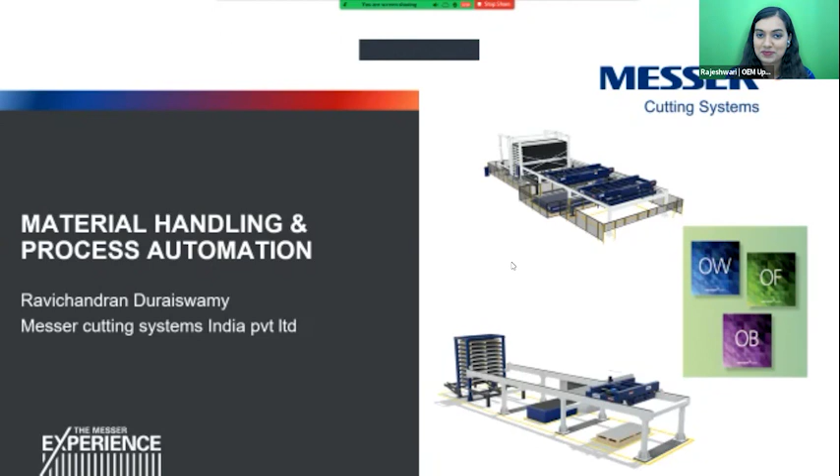Today, I'll talk about material handling and process automation in the thermal cutting industry. I'm basically from the thermal cutting industry, so my examples will typically be from that industry, but it can still be taken up as a general statement across industries.

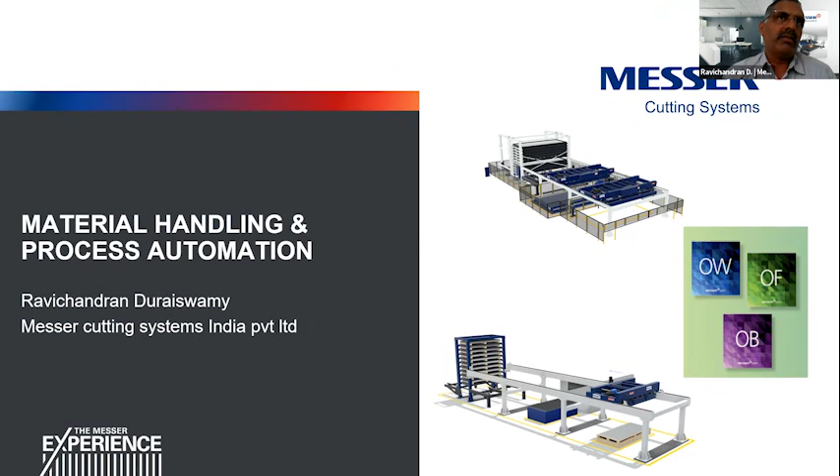Now the demand for quality goods is too high, and it cannot really be manufactured using the old method, which involves a lot of manual labor and manual monitoring. If you want high productivity, you need more automation in your systems, whether it's process automation, automation for feeding the machines, or, as our friend Mr. Shrikant explained, automation on the logistics side. So automation helps the industry achieve higher productivity and more reliable production. It's like everything goes hand in hand.

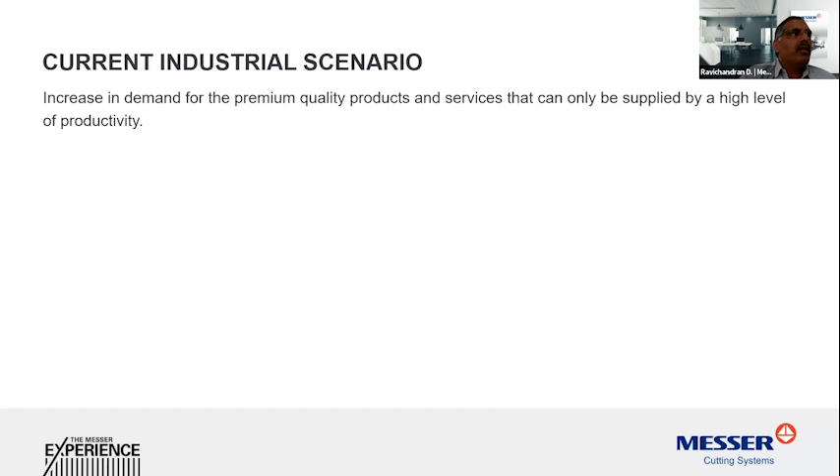The industry is also looking at a lot of cost-cutting measures. I don't mean cutting down people, it's about bringing down the cost of production and the cost of the whole system getting organized. So if you want a high level of productivity, you need very good process engineering systems, and automated machine manufacturing.

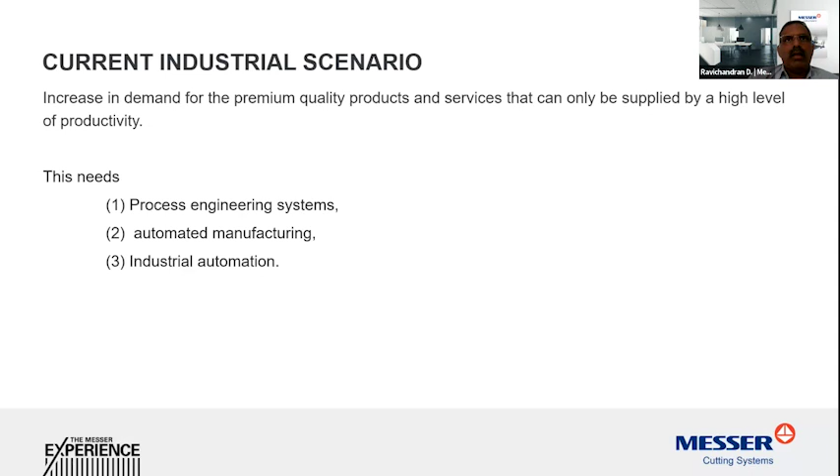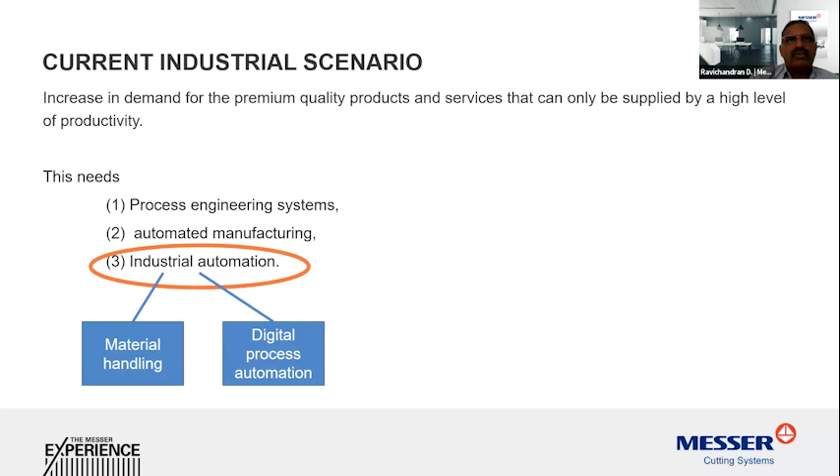I would like to linger on the third one, industrial automation. Industrial automation aids automated manufacturing, feeding the machines through material handling systems, and monitoring the process through digital automation. These two aspects greatly enhance productivity and bring out an agile manufacturing system. It reduces manual labor inputs, decreases cost, increases productivity, and makes production more consistent.

When you have digital process automation, there's more transparency in the whole production system. You can have real-time monitoring, well-advanced scheduling of your process, and you can get back data to check whether it's actually happening or not. If there's any discrepancy or deviation from the actual plan, the process will give you pop-up information so you know right at that moment that a deviation is occurring, and this helps increase productivity.

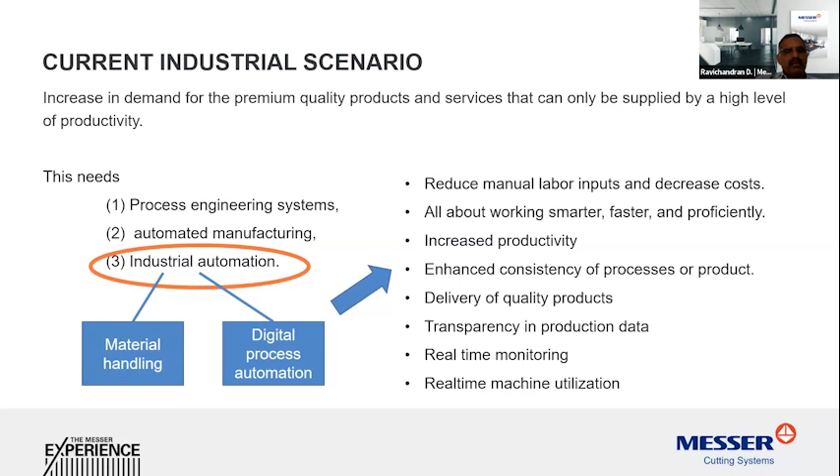Let's talk about these two aspects in two different ways: material handling and process automation. For material handling, what thoughts go into the industry that can aid the material handling system? If you want to increase productivity, you shouldn't have to wait for people to load the machines, because manual labor is not efficient right from morning till evening.

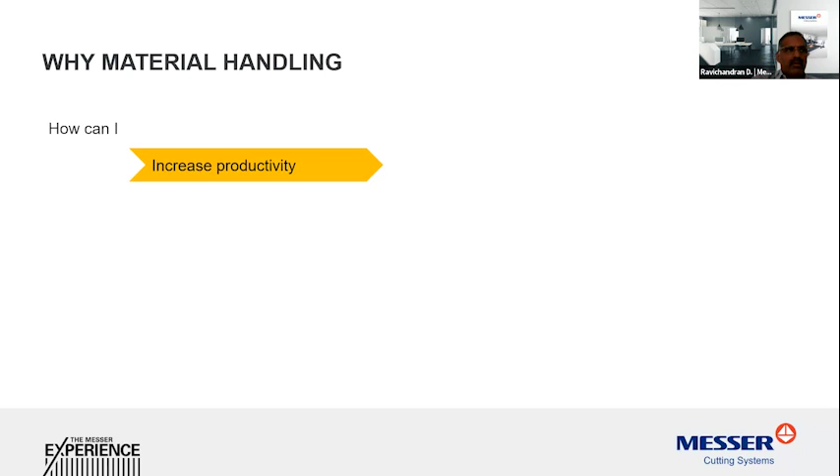Efficiency will be high in the morning and decreases at the end of the shift, and it goes on the same way day after day. Also, in days to come, there's a shortage of manual labor. So how do we increase productivity?

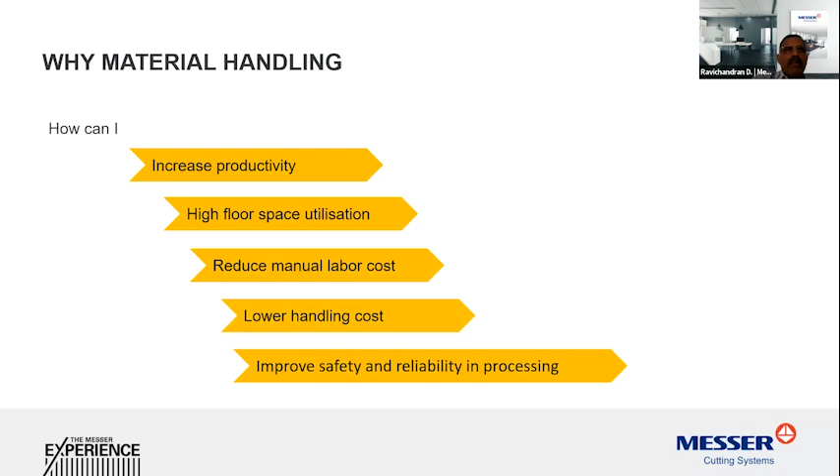When you have an automated storage and handling system, how do I increase floor space utilization? How can I reduce the floor space to fit more manufacturing units in a given area? And then how do I reduce manual labor cost and handling cost, and make the process safer and more reliable?

With a material handling system, I can ensure you can increase your production by 15%, reduce your storage area by at least around 40%, reduce manual labor by 80%, which directly leads to lower handling costs. And when you have a material handling system feeding your machine along with a process automation system, you can be rest assured that the operating zone or manufacturing zone becomes a safer and more reliable area.

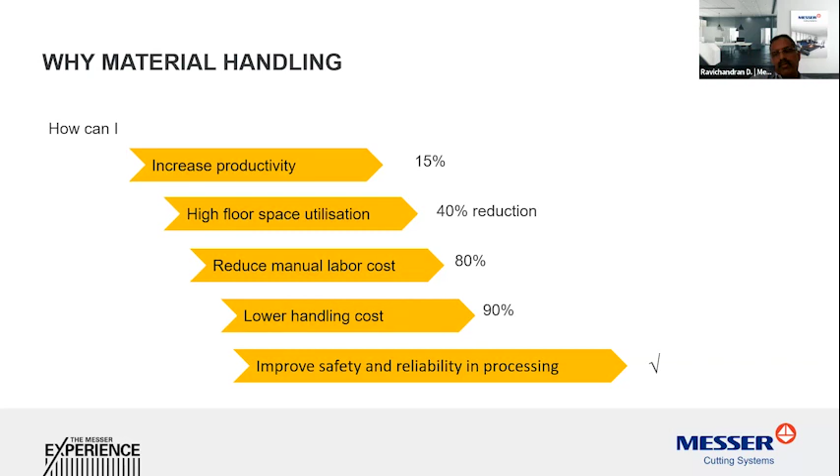This increases the flow of material, reduces stoppages of production machines, and so it increases productivity indirectly.

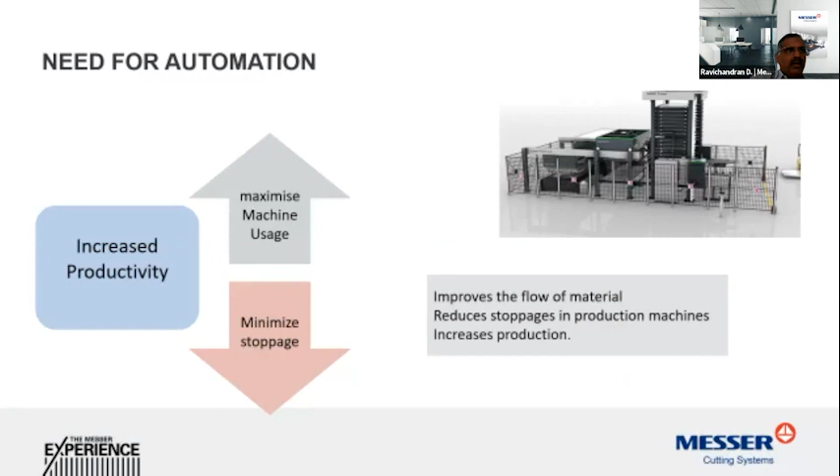At Messer Cutting Systems we have a series of material handling systems mainly for plate and sheet metal handling, since our industry is mainly into thermal cutting.

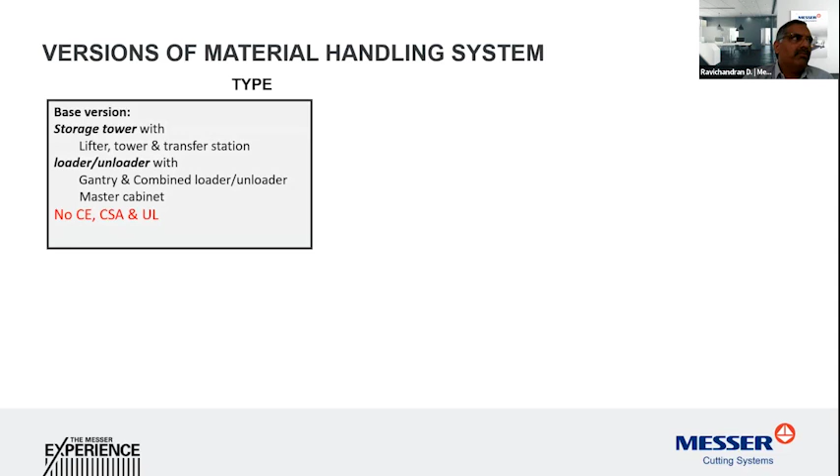We have a basic system for the Asia Pacific region and a premium system for Europe and the North American countries, which have more CE norms and CSA norms for the Canadian industry.

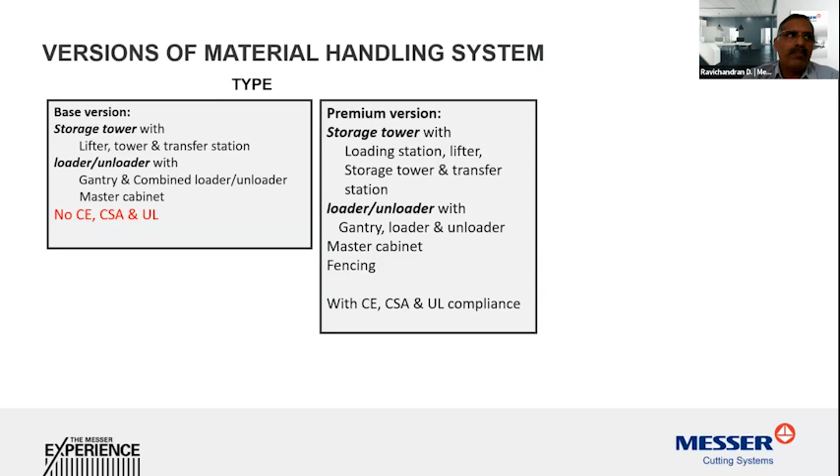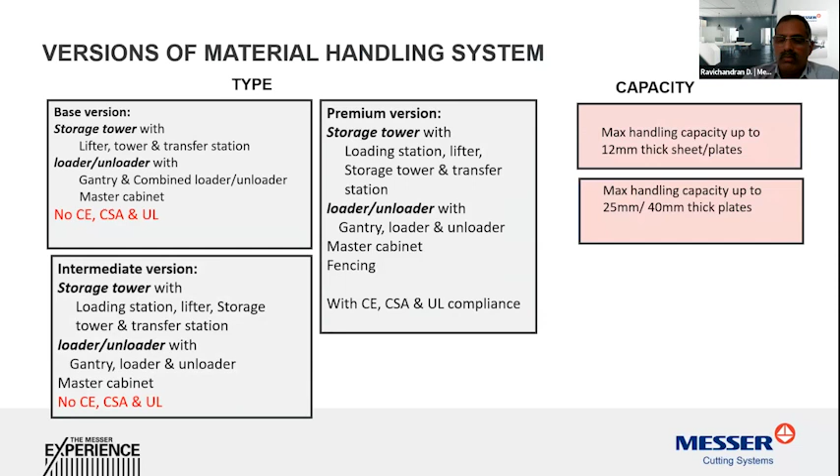Based on capacity, we can have light material handling up to 12mm, 25mm, or 40mm, so plates of 5 tons can be moved in one single go. These are some specifications which may take more of my time.

I would like to show you a video to understand how a storage and material handling system can be used in a thermal cutting industry. In this case, it showcases a laser machine.

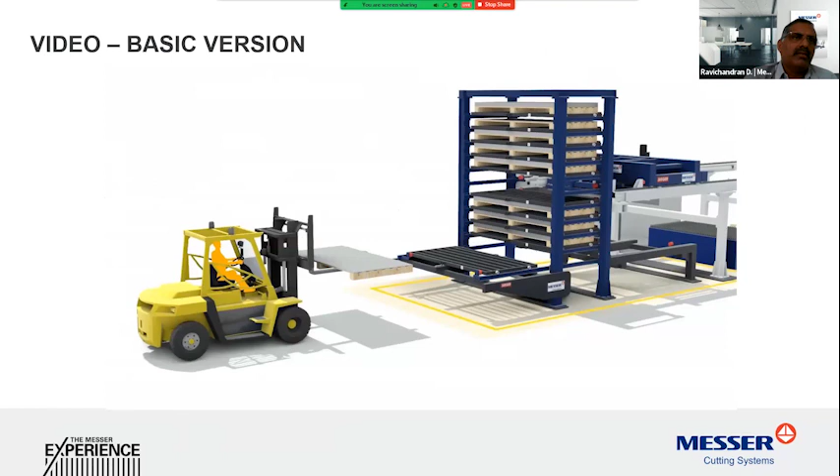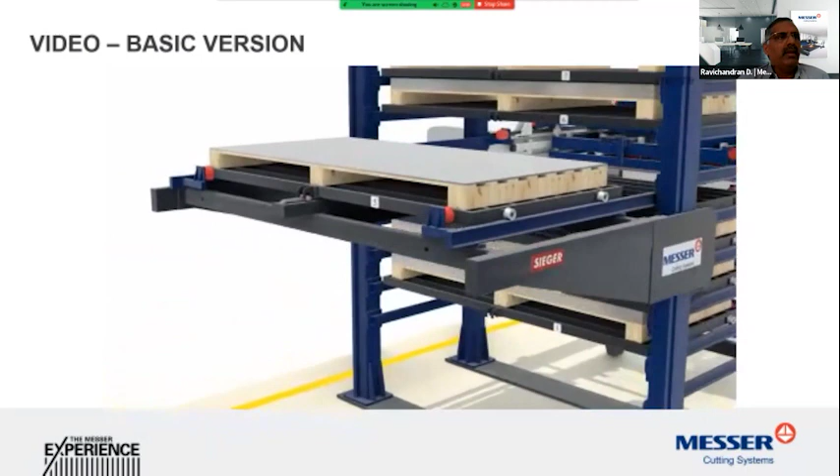You can have a forklift or a crane loading the input material bundle, and then it can be stored vertically. When you store vertically, you can save up to 40 to 50% of your floor space.

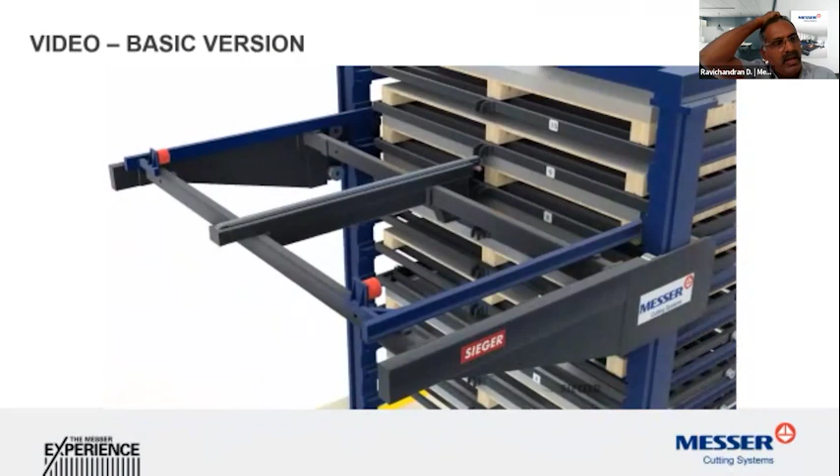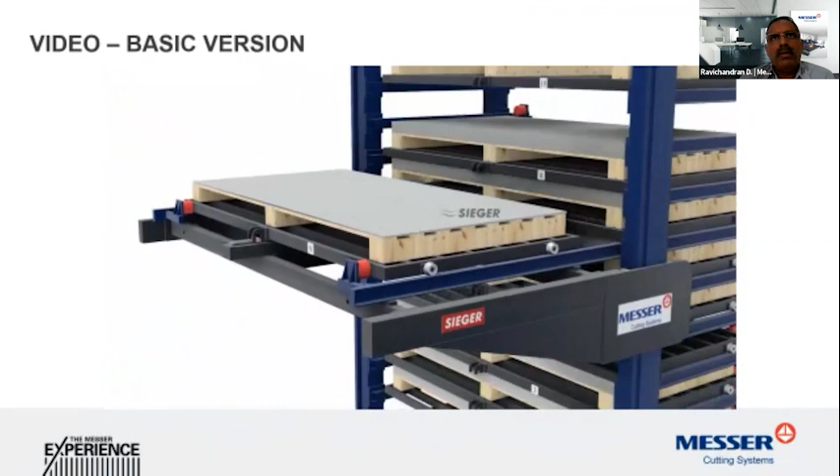When you are storing it, the whole system can be integrated into an ERP, which ensures your inventory is well accounted for. With horizontal storage, that can be repeated in multiple places for a single type of material.

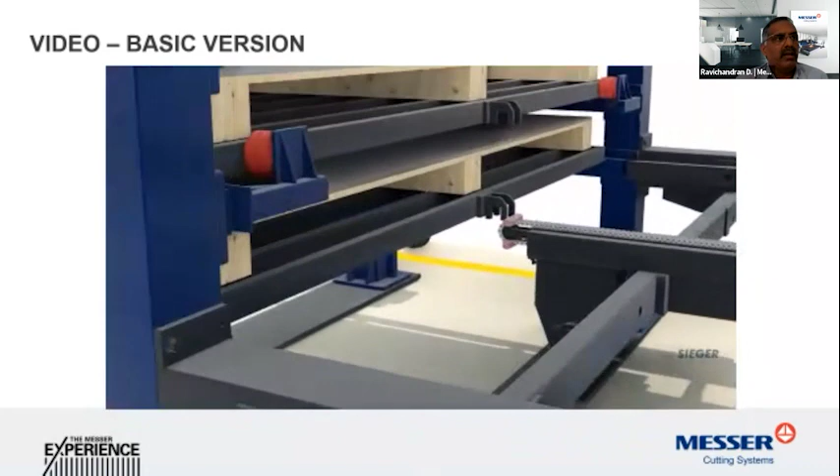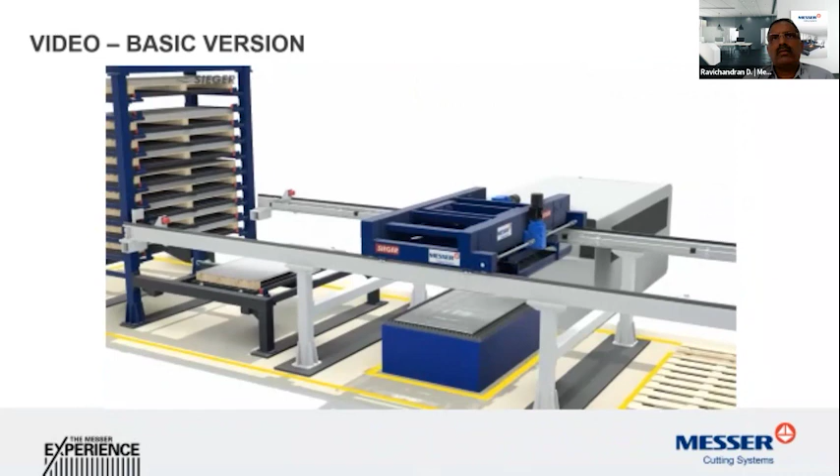But with vertical storage, you have a defined storage system and storage location, and you can have that integrated into an ERP system also. When your whole inventory system is accountable, your inventory goes down.

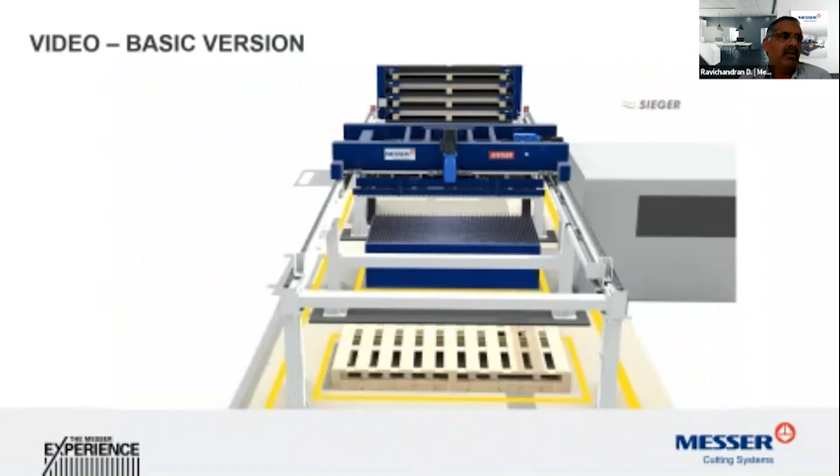This is after the part is cut into small parts. The unloader picks up the cut parts and drops them onto another platform, a conveyor, or a movable cart, whatever way we can configure it.

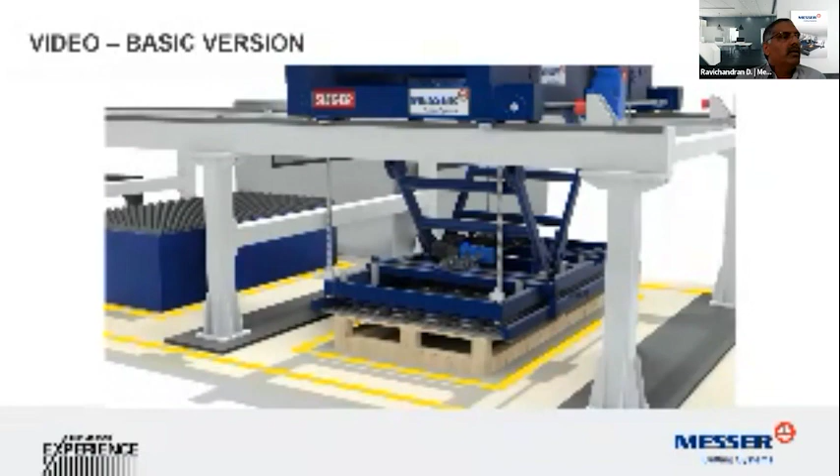So the cut plates are dropped in one go and the fresh plate is loaded onto the machine.

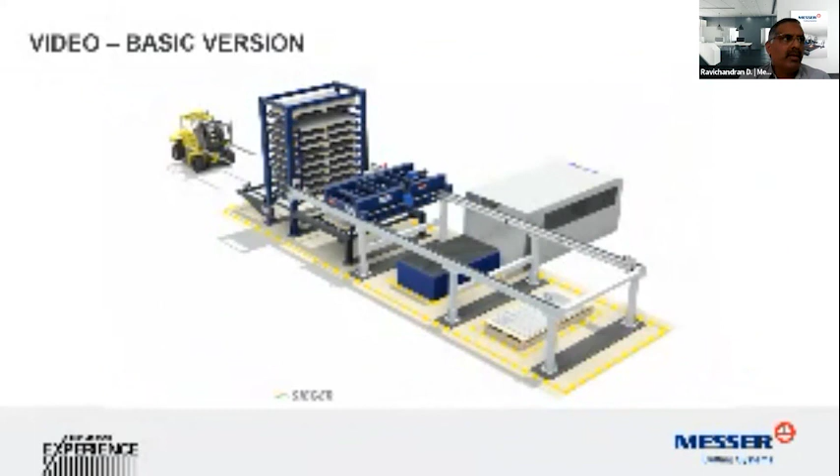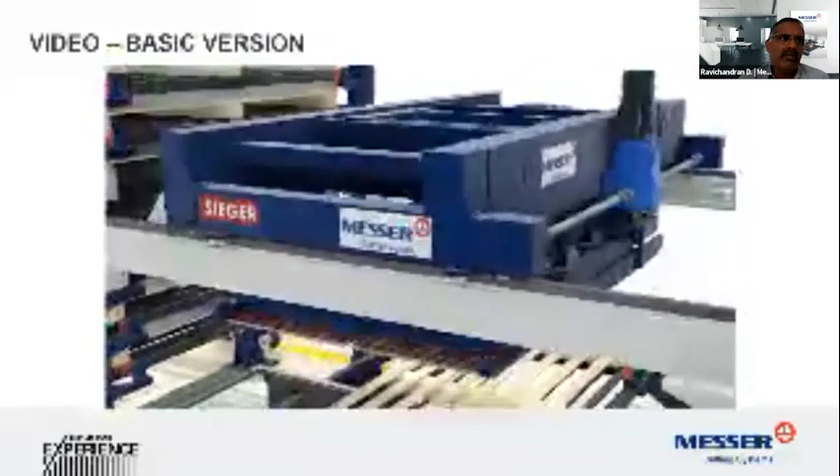If we don't have a material handling system, as many people would have witnessed, they have to manually pick up all the parts one by one and manually load the fresh sheet. That's a time-consuming effort, where the machine may wait or starve for material to be loaded.

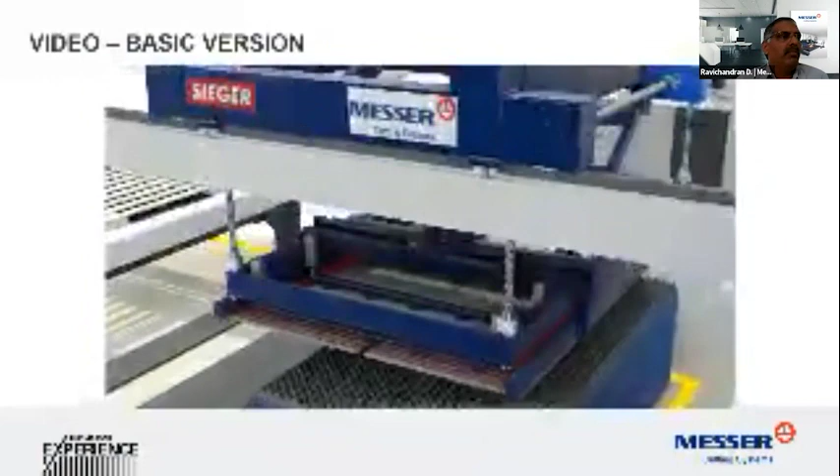This happens in a matter of minutes. This is one video which I think explains itself, and we can have different types of options in material handling.

You can have a material machine with a storage system and a single loading and unloading, or a separate loader and unloader, so that the time for loading the machine is reduced. You can have multiple machines being fed by one storage system.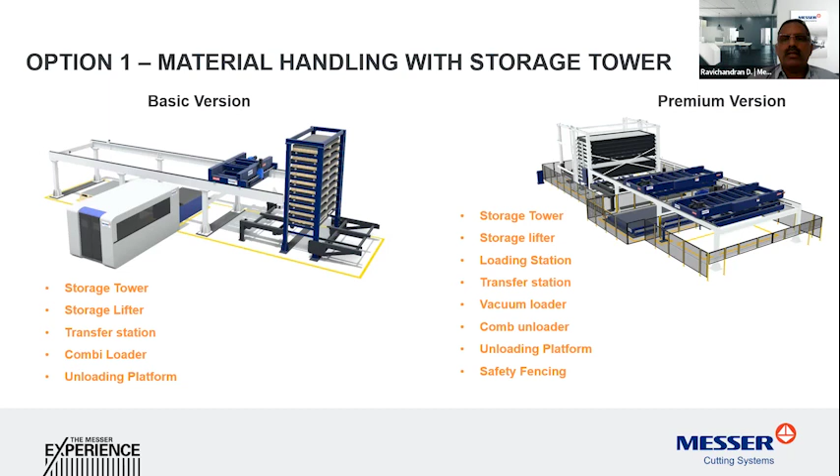Suppose you have different types of machines and don't need a storage system, you can have a simple pick and load onto the machine, and the cut parts can be unloaded at a different place.

You can also have a shuttle, which can be used to segregate the cut parts away from the machine area, making it a safer zone.

So these are different types of material handling. This is not the only way of doing it, because these are all highly configurable units.

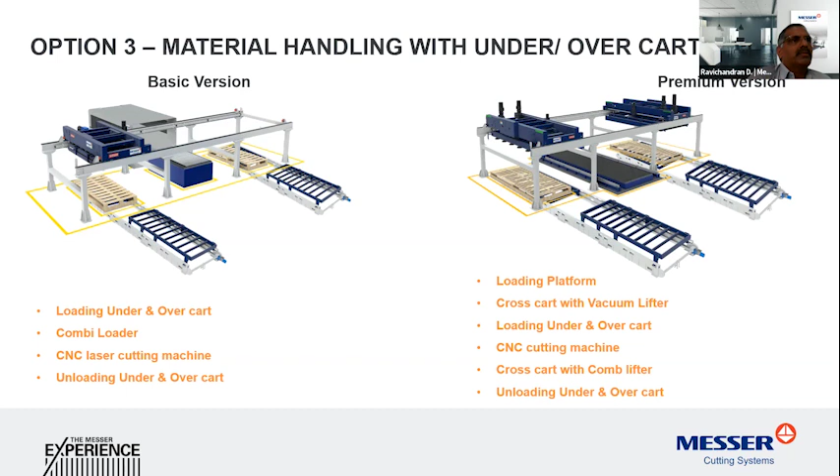Everything is modular, and you have to configure it based on your machine, the storage systems, and the process. This can be configured in many ways, and storage systems can be separate also.

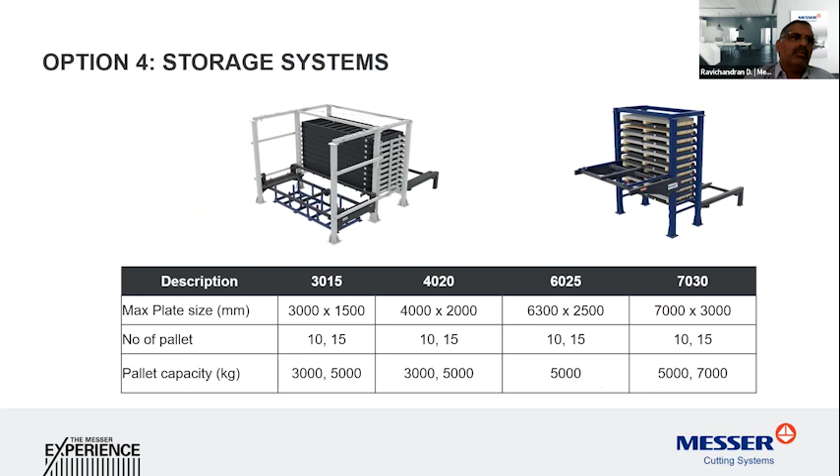This is to showcase that all the material handling systems are highly configurable and can be automated for customer needs. These highly configurable parts give you a direct result on productivity.

Then digital process automation. Why digital process automation? The point is, in a typical manufacturing industry, there are many activities which are really repetitive and manual in nature.

Like what's being cut - you want to know what's being cut. The operator notes it on a paper and passes it on to the supervisor.

The supervisor feeds it onto the ERP system. All these are manual steps. So how do I save these manual steps? Because it's just data, and data management only.

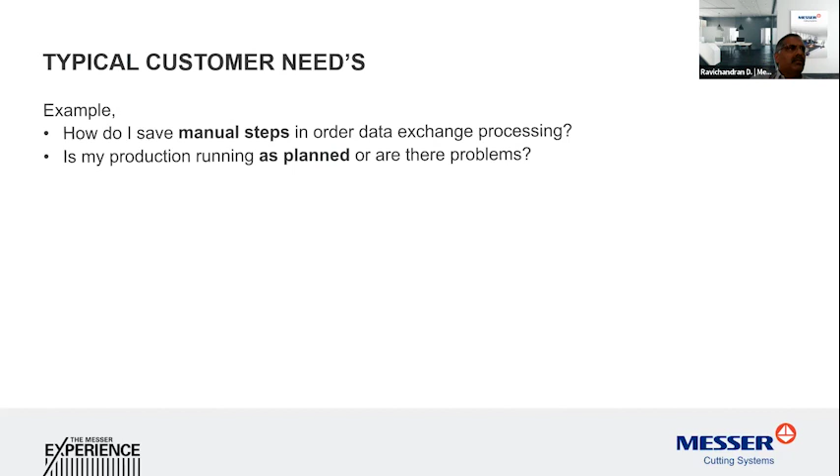So how do I stop this manual process? How do I plan it? And how do I ensure that my plan schedule is working or not? These are the general questions, and based on priority, how I can shuffle the demand and the schedule, and if there's any problem, how I can find out.

Next, how do I know whether my machine is well utilized or not? Whether the machine is starving for material or has some other issue. Is the machine stopped, running, or waiting for a maintenance issue? And what are the reasons it stands still?

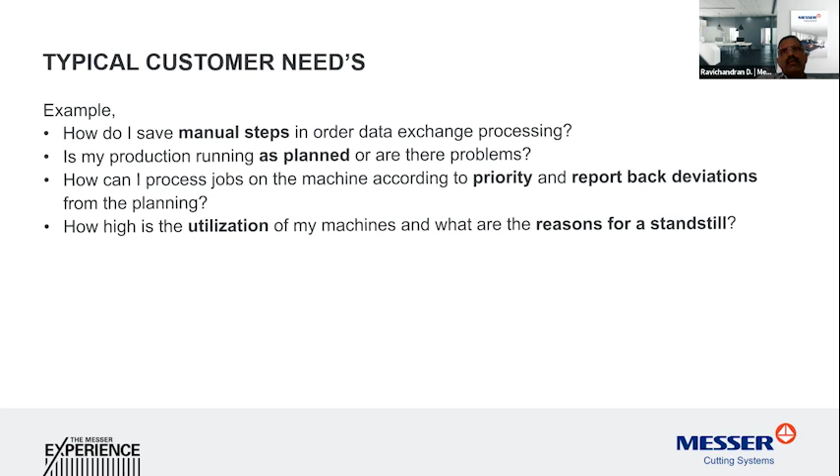If we don't have this information getting back to us in an automated way, there's no manual triggering. If everything happens automatically, everybody has the information at their fingertips in real time to know whether production is happening as per plan, or if there's an issue, and what type of issue it is. All this can be automated, and this is what we call process automation.

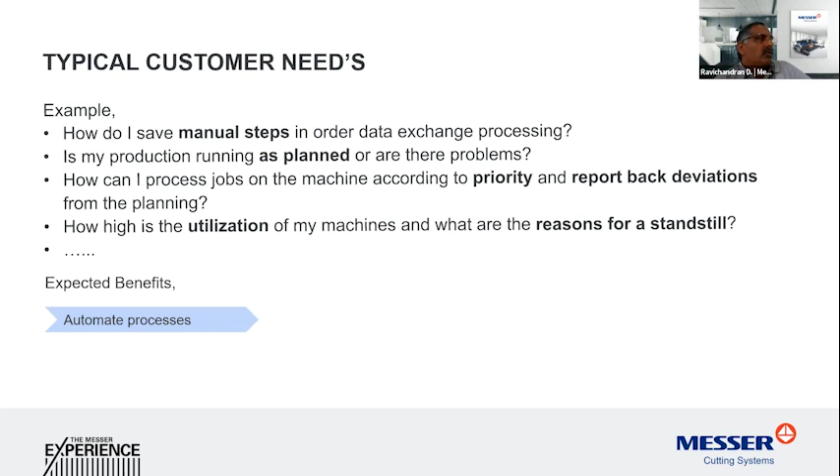So the expected benefits of these thoughts are an automated process. If you have a bottleneck in the process, you should know it well in advance so you can work towards it, with real-time feedback, high transparency, and effective part and order control.

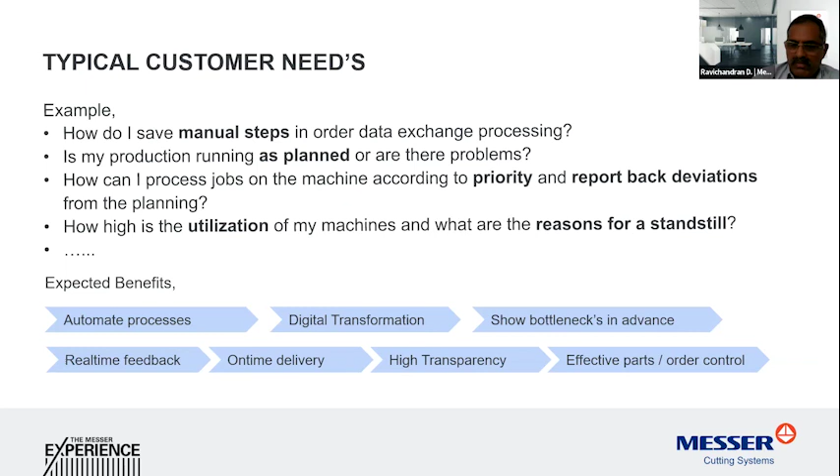All this is possible only through digital process automation. It's like when you automate it, you're giving an extra tool that can help increase your productivity. It's defined using digital technology to automate the process and workflow of material. The workflow isn't fixed, because each industry has its own method of workflow, and everything is configurable for that industry.

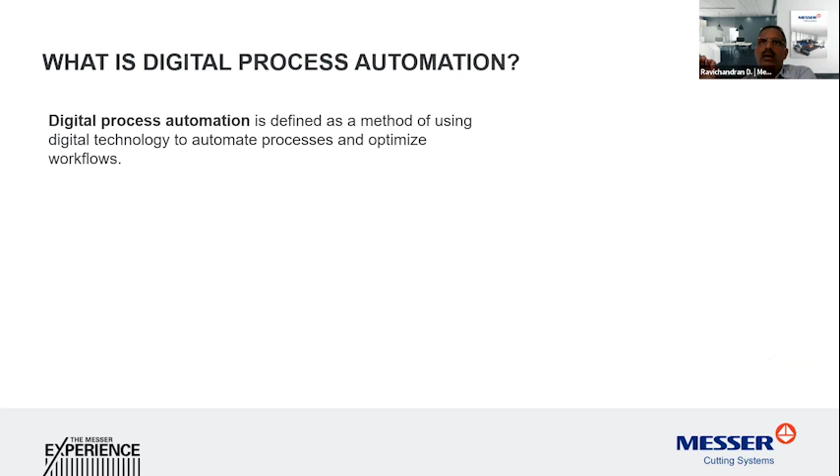This is just to show an overview of what we have. Normally in a production-based industry, these are the steps that go through a manufacturing process: order management, what is needed for production, then work preparation, which can be program preparation or tools preparation, then production planning where priority and scheduling is done, and machine operation.

Then business analysis: whether the schedule is adhered to, or if there's any deviation, or what has happened in the process—is it foolproof, is it acceptable, or is there any deviation in the output component. That type of business analysis. So if all these major five operations are automated, then the process is automated.

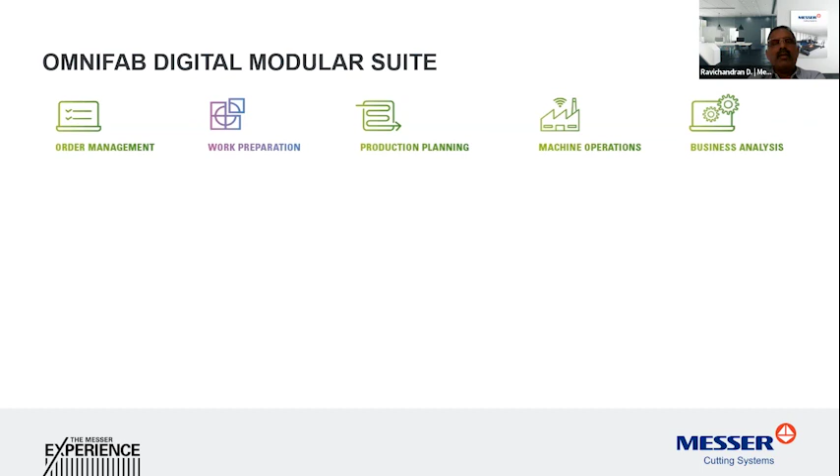For that, at Messer Cutting Systems, we have the following tools. When the demand is created from an ERP system, the program is done by OmniNest program, mainly for plate cutting type industry. We have the OmniFab ERP Connect, which takes data from the ERP system and converts it into parts of different thickness and material, then gives it to the programmer who can do the programming in the OmniNest software.

Then comes an aided tool, wherein if you're going to quote parts, it gives out the quote details like material sizes, weight, and process cost, and what gas or consumable the process needs.

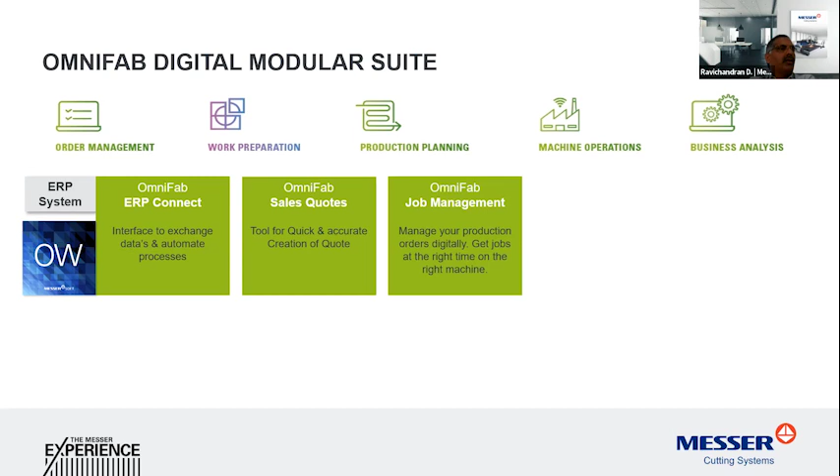The OmniFab job management schedules the job, and then the PDM means whatever job is done on the machine is automatically fed back to the ERP system also. The third one is Insight, which gives real-time information on machine utilization—if it's working properly, or if there's idle time, what type of effect and what reason is the cause for the idle time. So this type of real-time data can be available. So this is all about process automation.